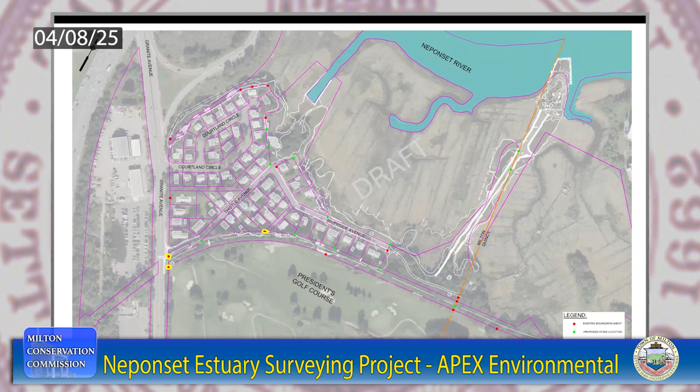Perfect, thank you very much. That is to continue the conversation of going out there, looking, and being aware of the property encroachments. I know we previously did a review on paper, but sometimes it's also helpful to visually see the property bounds for both parties, the residents and the town, to have a better idea of the path forward. Perfect, so that's kind of the hopes there.

Okay, so moving forward, here's an overall view of the proposed concept plan. This is an updated draft we are working on since incorporating the feedback from the visioning workshop we recently held at the end of March. I will go through quickly each of the further views of each sheet of the overall plan, but just to give you an idea of how the trail network is being proposed to be laid out.

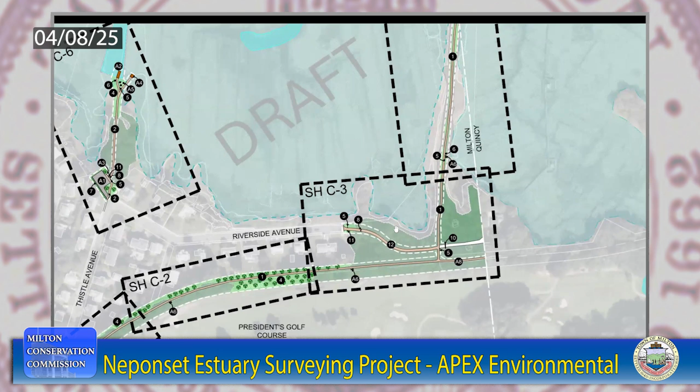We have about 1,500 linear feet of new trail shown in the railroad corridor, starting off of Granite Ave here, and it would be tying into the crosswalk along Granite Ave. Then the new trail along the railroad corridor would tie into the existing trail. This would be all resurfaced or new accessible trail surface, and then it would lead out and follow the same alignment that it follows today out to Black Rock.

And then the other section of trail that we're proposing is the Mount Hope Canal, where it starts at the intersection off of Thistle and Riverside Avenue. So now I'll go into more detail on each section of the concept plan.

So as I said, the new trailhead would start off of Granite Ave, tying into existing pedestrian connectivity and proposing to redesignate the parking area across the street into a shared parking area for users wanting to walk the trail. The new trail would be a minimum of 5 feet wide with an accessible surface treatment.

In the brighter green areas, we're showing either vegetative enhancement or green space to address where we've seen property encroachments such as yard debris or existing sheds, relocating that and bringing back tree cover or salt tolerant shrubs. At about 600-foot intervals, we've located accessible park benches as rest areas along the trail to provide further access to users.

Moving along the trail, the new trail system would tie into the existing trail. This is something we incorporated from the visioning workshop, since discussing with the city of Quincy, they mentioned interest in improving the portion of trail that crosses over the town of Milton line into the city of Quincy at 0 Harriet Ave. There may be opportunity to better tie the trail system from Milton to Quincy, because users come over from the Quincy side to get out to Black Rock.

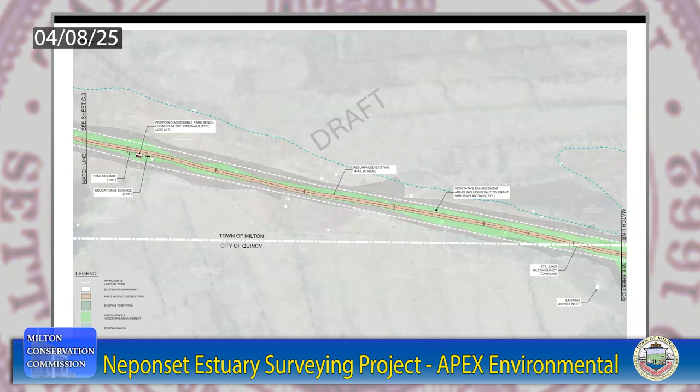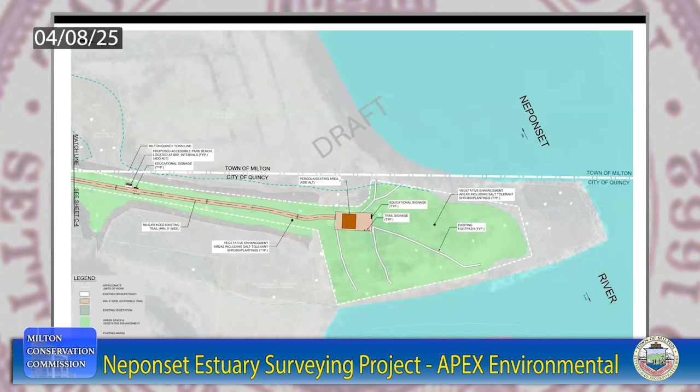Again, we have located a rest area, and you'll begin to see trail signage and educational signage out to Black Rock. At the point out at Black Rock, we've proposed a pergola with seating area as a vista point for users to sit and enjoy this area and river access, as well as potentially bird watching and enjoying the natural habitat and estuary.

Along the Mount Hope Canal side, we've shown a new trail tying into the existing sidewalk off of Thistle Ave, and resurfacing the existing trail to be ADA compliant, potentially proposing a canoe and kayak launch ramp, as well as accessible picnic area and educational signage adjacent to the Mount Hope Canal.

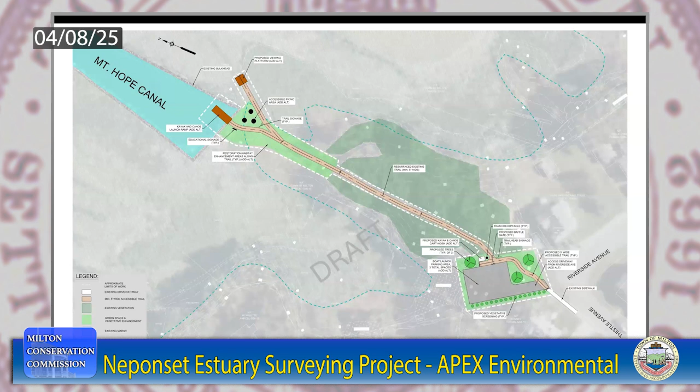We also discussed during the visioning workshop what would be a feasible approach to building out this trail network. Some of the feedback we considered was a phased approach, breaking this project out into 3 parts.

One, hatched in blue, would be the railroad corridor - the new trail alignment, about 1,500 linear feet to the existing trail. The resurfacing of the existing trail out to Black Rock would potentially be phase 2. Phase 3 would be the build out of the Mount Hope Canal and parking area.

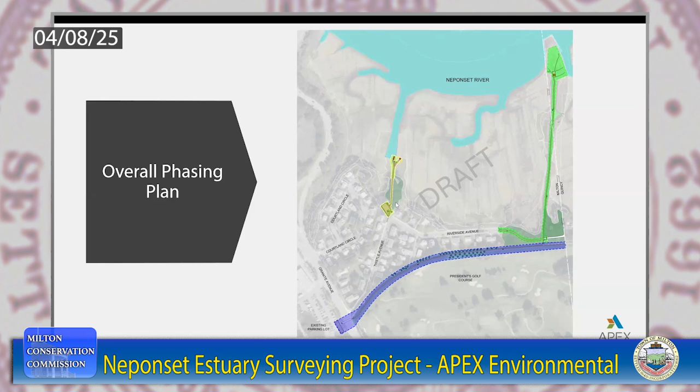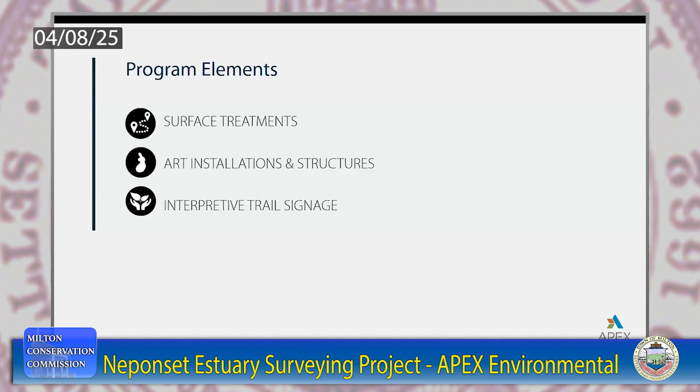Just to give you an idea of some of these features, such as the surface treatments we're considering, the ADA surface treatments, potential art installations and structures along the trail, and interpretive trail signage might look like, I've provided some examples of precedent images, just to give ideas of what the trail system could look like here in Milton.

So I'd be interested in seeing what the Conservation Commission's opinion is today on what types of material they'd like to see the trail built out with. Please note the trail could also be a combination of these surface treatments in order to reduce cost and provide less environmental impact.

Jamie, on that point, one of the things we discussed at the envisioning workshop was that a portion of this trail area is inundated periodically. And when I say periodically, it's not just regular tides - sometimes it's king tides or full moon tides, the big tides. So to the extent there are areas regularly inundated with water, the stone dust might not work because it could get carried away by the tide. In thinking about these alternative treatments to make the path ADA accessible, we really have to keep our eye on where the flooding is going to occur. And by the way, the flooding is going to get worse, not better, over the next 50 years or so.

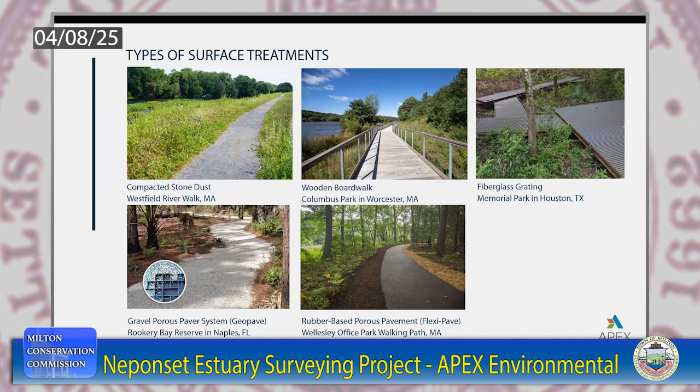Yeah, and then ultimately it will provide the town with the information to make a decision on maintenance and cost in order to select types of surface treatments moving forward.

So I think we've covered most of this, but let me categorize some of the key takeaways from the feedback we've received so far between short-term and long-term planning. Some key takeaways in the short term: the driver of the design is accessibility and maintenance. Material selection and surface treatment for the trail should minimize environmental impacts. For short-term planning, we'll continue stakeholder collaboration with the City of Quincy and potentially Norfolk County, and continue internal conversation about long-term maintenance responsibilities.

For long-term planning, some key highlights mentioned were looking at climate adaptation and incorporating the Neponset River Watershed's report on the Neponset River and estuary, and how that ties into the development and improvements to this trail system. As well as looking into user safety and education, keeping that a focus as the trail design progresses. And looking at future connectivity opportunities with the City of Quincy's trail system—they're also looking at improving their trail, so there could be an option for a future grant to work with the City of Quincy and the Neponset River Watershed Association. Long term, we're also looking at how these trail improvements can enhance and restore some of the vegetative areas we've seen taken over by invasive species.

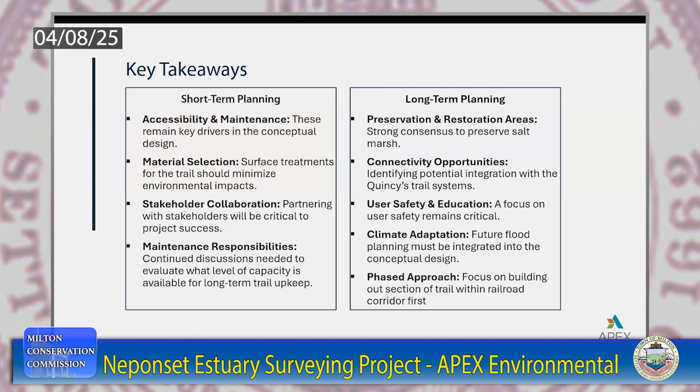So next steps: Thursday, we'll be going out and installing wooden stakes along key property bounds. End of April, beginning of May, depending on additional feedback we receive, we'll be working on wrapping up the draft memo, fact sheets, and conceptual design and costs. Following that, we'd like to host a hybrid progress meeting to review project deliverables and walk the project site to look at those wooden stakes and where they were installed along the key property bounds. Then, to wrap up the project, our last task is to present all of this information at a public meeting.

And that's the update I have for tonight.

Jamie, that was very good, succinct, direct. I'm very pleased that you were able to present tonight. Maybe we ought to put this on our May agenda anyway. I know it says early to mid-May, but just to protect the public record, we should put it on our agenda for the May meeting, because it looks like we might be at a point to at least get up to speed on where you are with the public meeting.

Sure, I can talk to Arthur about that. I think it really depends on if there's any more feedback we need to incorporate into this draft submission in order to have the hybrid progress meeting. But I look forward to pushing this along and hopefully meeting our early to mid-May deadline.

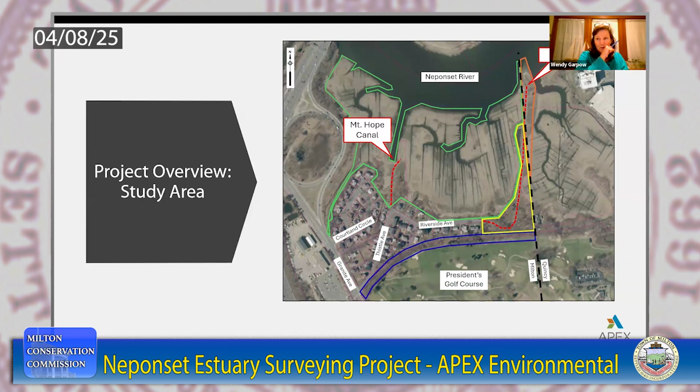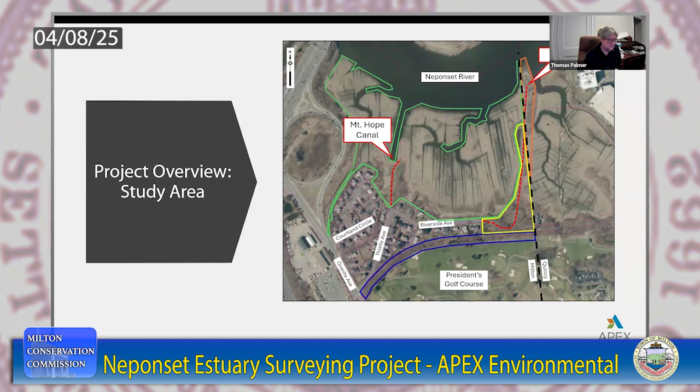Sounds like a good plan. You may want to talk to Tom about whether or not he wants to announce a public meeting and have a joint public meeting in May, or at some point we'll definitely have to do that, but that might be at the actual public presentation.

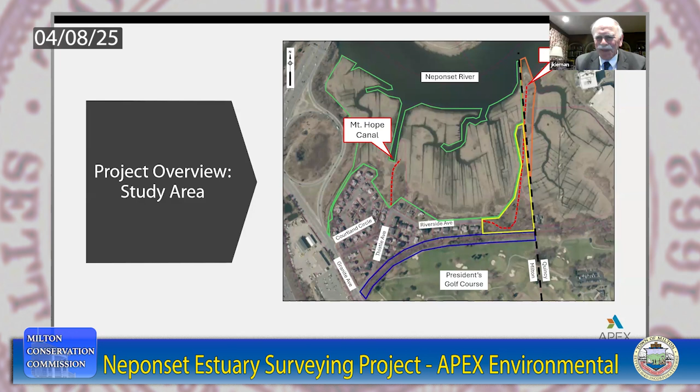It's certainly a great idea to have - I know you have the eyes and ears of the Community Preservation Act committee here, and you're our designee there. But I'm wondering whether at that first meeting it should be a joint public meeting for both committees and others, or perhaps just representatives. But clearly the next step after that would be the public announcement of this, and probably we could do it on site, as we did the site walk. That's just a thought down the road. But you're right, it's all within mid to end of May, because we've got to move pretty quickly on this, and funding will be critical to phase 2.

And since the funding is only open once a year, I would hate to miss this next round and then have to wait until 2026. I agree.

All right, Jamie, I don't know - what information would you need in order to apply for the CPC application in this round? I'm sorry Jamie, could you repeat your question please? What information or what final deliverables would you need in order to apply for the next round of CPC funding?

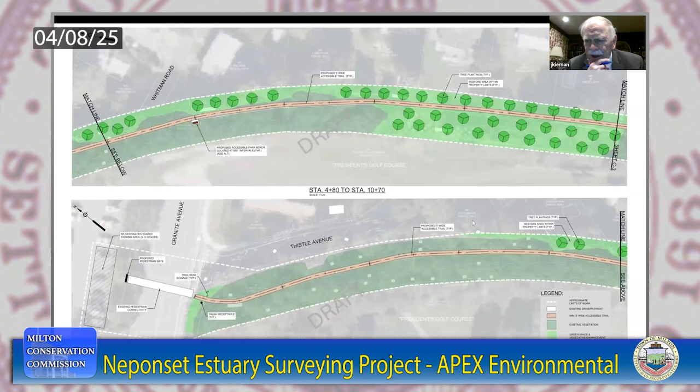Just so I make sure I'm understanding what it is I'm asking of Tom: we're hopefully going to have Jamie come back to present at our next Conservation Commission meeting on May 13th. Then in addition to that, there's also going to be another in-person on-site presentation later, which would be the public meeting. Both would be public meetings, properly announced, with notice going out per the open meeting law. The first is a Conservation Commission meeting to discuss the concept plan and preliminary costs.

And then after that, according to Jamie's schedule, she contemplates having the public meeting, which could be done on site as well. I think that's what Jamie, you were contemplating, correct? Yeah, it's this hybrid progress meeting—we're trying to have a hybrid progress meeting before we finalize the plans and present to the public. That's what this progress meeting is for. So before or after the progress meeting, we'll have the meeting. I'll be back for the Conservation Commission meeting on May 13th, and then following that would be the public presentation. Does that answer your question, Wendy?

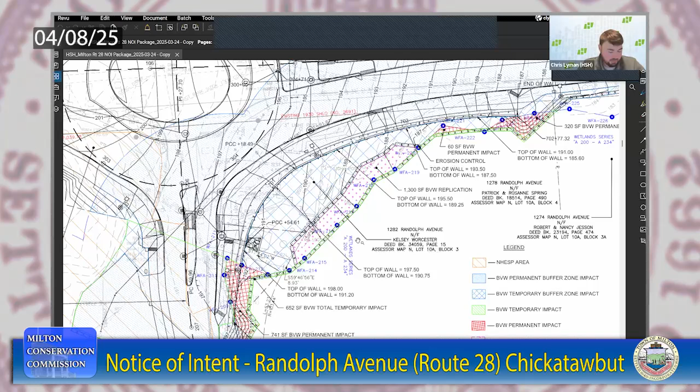There will also be restoration of the temporary impacts along the sediment control barrier with a wetland seed mix. The wetland replication area is being designed with existing vegetation cover types, functions, and values, and will provide more improvement to this BVW. The replicated wetland area will be graded to create a hydrologic gradient that supports the range of cover types proposed for this project.

After the grading of this wetland area is complete and the construction is finalized, the sediment control barriers will be removed and a wetland seed mix will be put down to restore those temporary impacts.

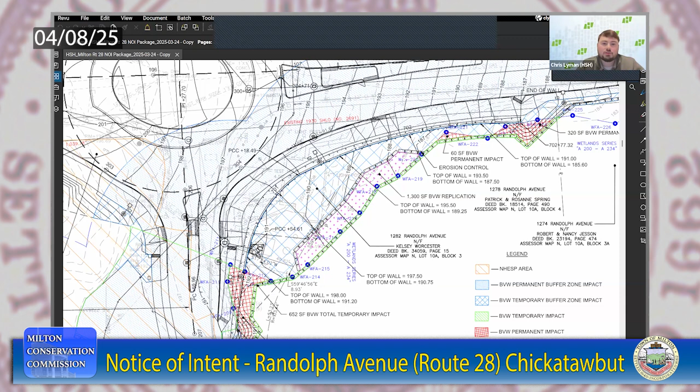We're also proposing to include drainage updates at this location, one of them being updating the outfall at this location, basically just putting more stabilization rock at this stormwater outfall down here to better stabilize the bank of the outfall itself.

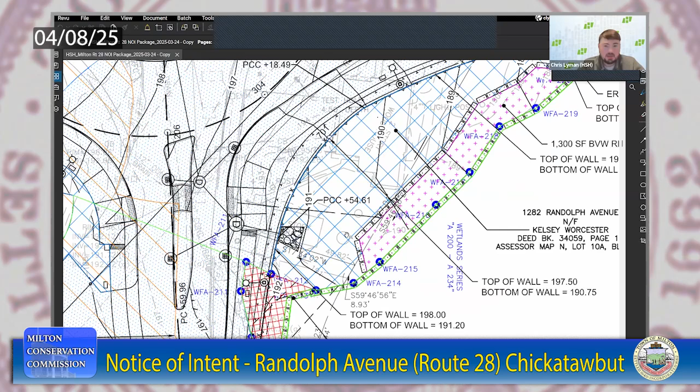And we'll be putting in silt sacks at all existing and proposed catch basins within the project limits. I don't know whether Courtney or Steve would like to add anything to what I've presented on so far.

Can I ask a question? This isn't really an environmental question, and I know there aren't a lot of pedestrians in this area, but there's a light there now, so it allows for pedestrian crossing. I know it's a dangerous intersection, but with the rotary, how do you get people across there?

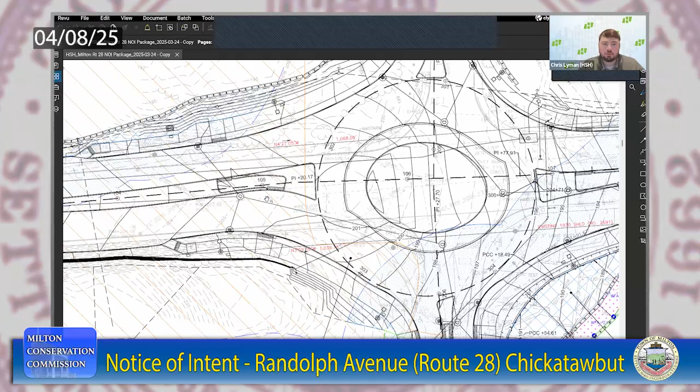Yeah, so we have pedestrian hybrid beacons going in, a form of a light, only on Route 28. A pedestrian or bicyclist will come, press the button, and it'll initiate a stop control on the approaches on Route 28, giving a protected crossing for pedestrians or bicyclists crossing. On Chickatawbut Road, we're proposing flashing beacons at this location, which isn't a stop control, but it alerts vehicular traffic that there's a pedestrian trying to enter the crosswalk.

Great. Okay, thank you.

I'm sorry, on this diagram right now, which way is north? North is to the right of the screen here, and south is to the left of the screen.

So the barn that we inspected a few years back, probably 5 or 6 years ago, that was going to be rehabbed or moved or something, is that to the right side of the diagram?

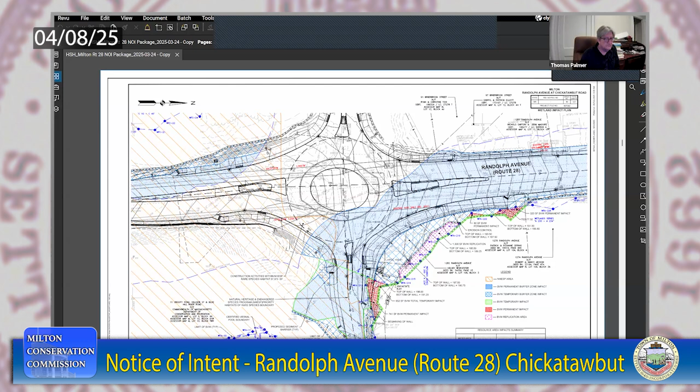Let me pull up the sheet and pull that off the diagram.

I think the barn you're talking about is this structure right here, this wooden barn structure, at the southern limits of the project.

Yeah, because we had seen some wetlands in that area when we were there a few years back. Yes, in fact they're on the plan, John. We've added the wetland here, and given that buffer zone, as I said.

From that wetland there's some permanent and temporary buffer zone impacts, strictly in this location where we're adding the sidewalk, and you can see we're slightly widening the roadway here to accommodate the roundabout.

Good, okay, that was just orientation. Chris, question - how far south is that sidewalk going? Is it going down to the barn?

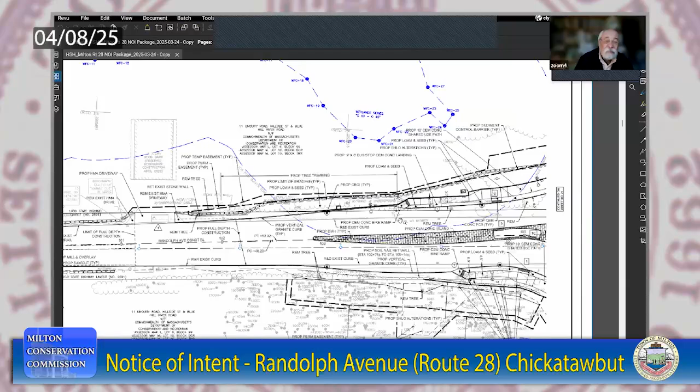No, it does not go down to the barn. You can see the barns here, and the sidewalk, or the shared use path, stops at this location right here. So it's only a couple hundred feet, I guess you'd call it, south of the existing intersection. Okay, thank you.

Can I ask why a rotary is now a roundabout? Because it's the same thing, right?

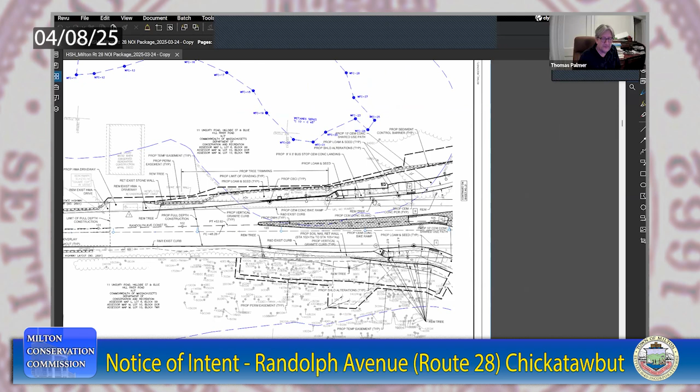I know that specifically the terminology we're using is for the roundabout. It basically has to do with the size and the function of a roundabout. Rotaries aren't always roundabouts, but roundabouts are a form of a rotary, if that makes sense.

Roundabouts are strictly a certain size, and they try to minimize speed of traffic entering and exiting the intersection.

As I look at this, and I look at what I guess would be the southeast quadrant here, I don't see an existing conditions plan, which would help us understand how this relates to what's there now.

And I know in that quadrant there is a parking lot, and it also has a gate that extends across Chickatawbut Road. What's happening to that parking lot and that gate?

Yes, so you're talking about this location down here. There's a parking lot - part of this project is reconstructing part of this parking lot here at this location.

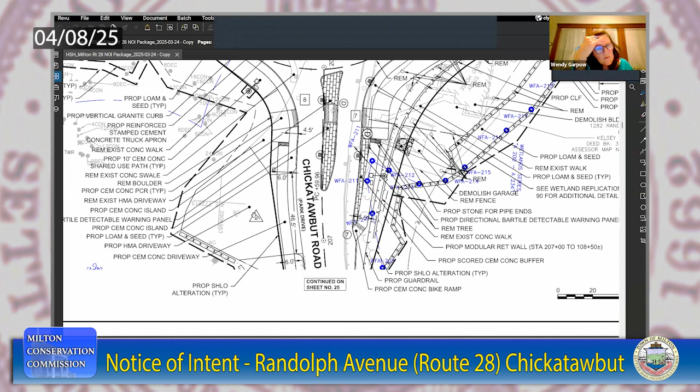And if you go farther up Chickatawbut Road, let me just go one more here so you can get a better look of this side, just so you can get a better orientation.

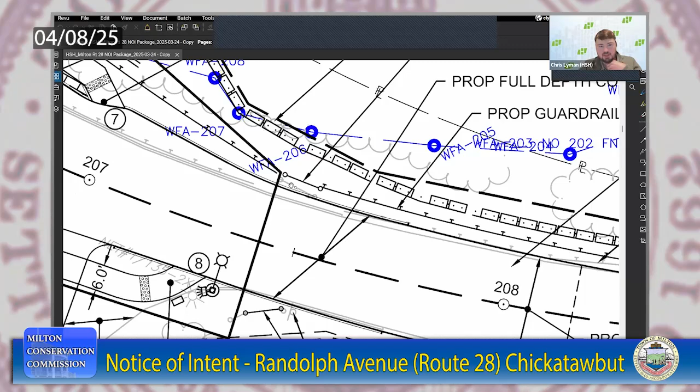So this is the parking lot you're talking about here, the parking lot to the Blue Hills Reservation. And the gate structure you're talking about is right here - you can kind of see the existing gate structure. We are maintaining those gate structures; right now we're just removing and resetting them as part of this project. So those gates will be remaining.

To me, the mitigation of that project should include consideration of how to increase the value of the priority habitat here.

And what I'm talking about is trying to prevent animals from being run over, which is a common cause of death.

I think the project as a whole is permittable for wetland impacts, as you're suggesting, but it should take some imagination and creativity to address this habitat issue.

Yeah, we did submit a MESA checklist and a copy of this NOI to Natural Heritage. We've also been talking with Fish and Wildlife about that exact issue you just brought up. It wasn't in the scope of this project, but we have been talking to Fish and Wildlife.

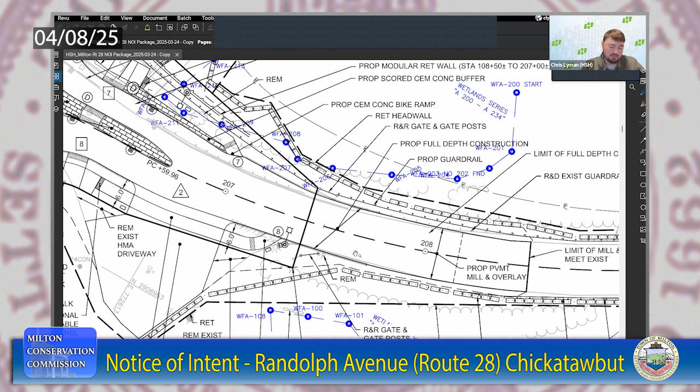They've been talking about potentially putting in gates, updated gates, to help get seasonal closures for this location, but that is not in the scope of this project.

But we have been working along with MassDOT, Fish and Wildlife, and DCR to address that potential problem of endangered species and species getting hit in this location.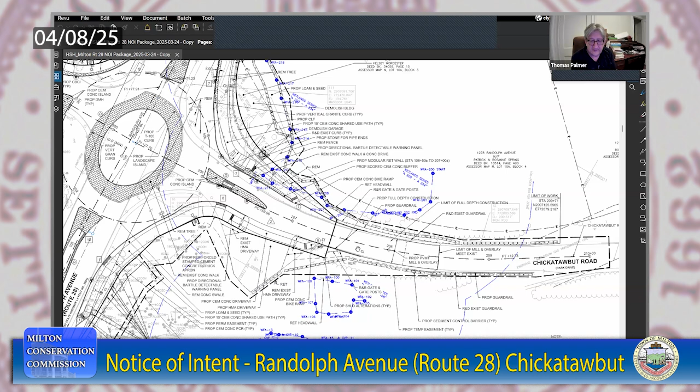As you go south on 28 from here, you're going through the reservation, which is very popular for people to visit. Many people park on Route 28 to the south, particularly beyond the wetland at the southwest slope of Chickatawbut Hill. I'm one of those people who often parks on 28 to visit the park, and when I get back in my car, I have to get back onto 28. The way I'm able to do that is the light creates breaks in traffic, a little gap where no car is coming. Will those gaps still happen when that light is replaced by this proposal?

I don't know, but we've been talking to other residents about the same concerns about gaps happening at their driveways. Again, there is a potential that those gaps might be less significant. But Steve, I don't know if you wanted to add anything specifically, because we've been doing some memos too about those specific gaps caused by the existing signalized intersection.

Sure, I'll jump in if allowed through the chair. My name is Steve Tyler with Howard Stein Hudson. In answer to Mr. Palmer's question, there is a difference in gaps expected. Separately, there's been some corridor studies looking at that effect and what effect it has for people pulling out and so forth. So those are available, but there will be a change in conditions on the Route 28 corridor with the change from a signal to a roundabout.

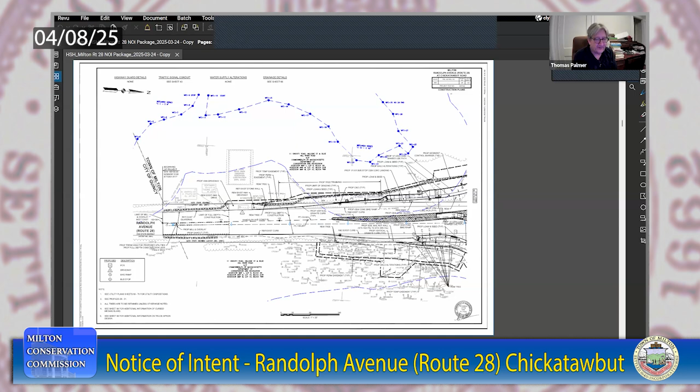One more follow-up to what John Kiernan said - you said there will be pedestrian crossings on Route 28 south of the roundabout. Will there be pedestrian crossings? Will there be four of them? Will there be pedestrian crossings at every side of this?

Yeah, if you look at the plan, there are pedestrian crossings at all 4 legs of the roundabout itself. On Route 28, because of the higher speeds and higher vehicle traffic, we are putting in pedestrian hybrid beacons - a stop control that's basically a red light that stops traffic and allows pedestrians to cross in a controlled intersection. Whereas on Chickatawbut Road, where speeds are a little less, we're putting in flashing beacons to warn that a pedestrian wants to enter the crosswalk. But yes, there are crossings at all 4 legs of the intersection.

So is the wetland currently flagged? I believe they are, yes. Okay, because I'd like to take a site walk there. I think it's appropriate. But I just want to make sure it's done under safe conditions for all of us, because it is a difficult traffic area.

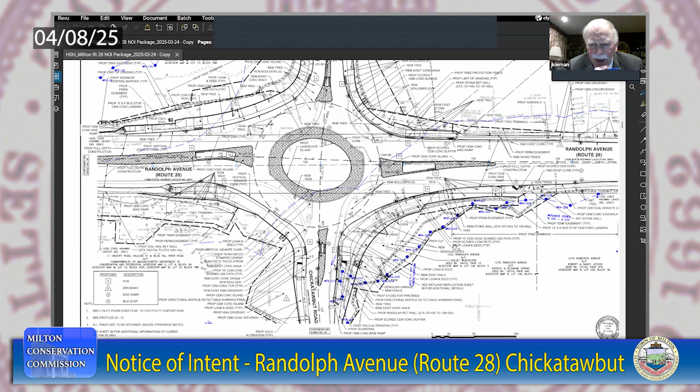I think there'd be places for us to park, either at the barn on 28 or Chickatawbut Road, right where that fence and gate is that Tom was mentioning. There's an area there. Is anybody else interested in a site walk? Commission members? Yes, yes.

All right, we typically do this on Saturday morning. Is that something you could accommodate? I should be able to, yes.

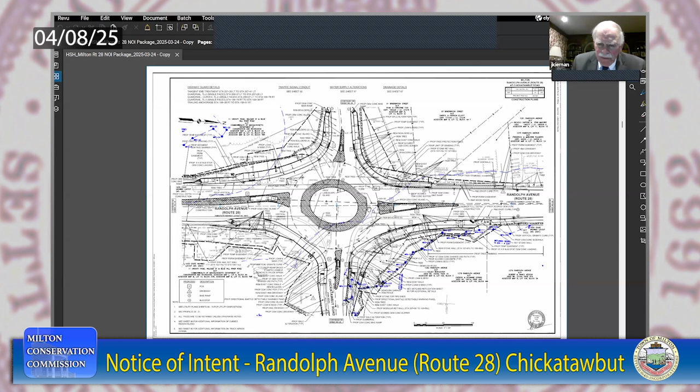Very good. Everybody, if you would, look at your calendar to see whether or not we can plan one within the next month. Dates in May? How about next Saturday?

Let's go through it. I don't have a preference for one Saturday or another. John, that's the Saturday before Easter, and some families may have plans. Perfect, how about the following Saturday? Works for me. What's the date on it? That's the 19th. The 26th.

I'll be out of town on the 26th. No, I won't be able to make it. So wait a minute, which one is Easter? Is it the 19th?

The 19th or the 12th? No, you mentioned the 19th, and I said— No, I said next Saturday. Oh, next Saturday, you mean this coming Saturday? Yeah, it depends. That'd be next Saturday. How, what do you mean by next? This coming Saturday is the 12th. Is that the date you mean?

You're right, I'm just throwing out dates to see what's most convenient for most people. So we've got the 12th, 19th, 26th, and what's the one after that? I don't think there's one in April. After the 26th is what? The 3rd of May. May 3rd. All right, so the 12th is too soon, the 19th is Easter, so our choices are the 26th and May 3rd.

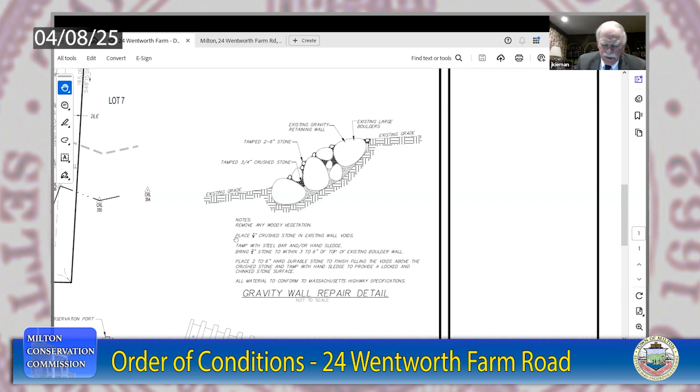Yes, and I note carefully the discussions we've had in the past, and I did read Deb Keller's recommendations as well. So the simple answer to your question is yes.

Okay, that's good news. As far as what Deb added to the drainage from the previous plan, she added about 100 cubic feet of storage with stone on the top and the bottom while maintaining the elevations, which was brilliant, and added some additional overflows which allow larger storm events to pass through easier as opposed to backing up. Again, brilliant.

So she made the plan better, and the client's happy with it. As long as you guys are happy with it, I think we're ready to go. All right, Jim, I think questions? Go ahead. This is Steve Ivis, I think Deb did a wonderful job.

Thanks, Steve. You don't get any credit, Jim, at all. Are you kidding? She's not here. She's not here, it's too bad. She did a great job. Jim did a great job. The two of them worked well together, which is always helpful.

Thanks, Ned. Sorry, Jim, and you're right. We have a client who's pleased, if this is the final plan, he's pleased with it. He's ready to get to it immediately, and appreciates the consideration given by the commission as we've moved through, what has not been an easy process.

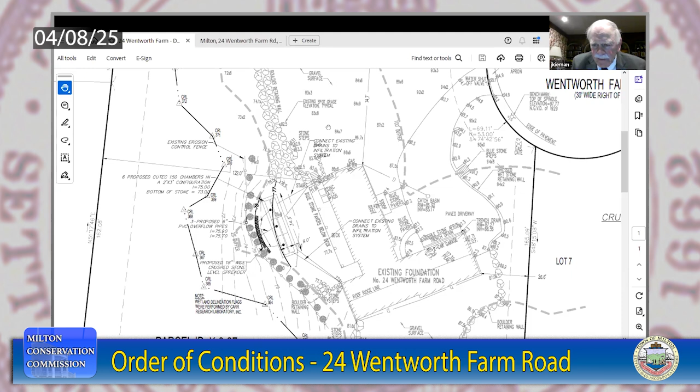John, this is Arthur. This solution addresses the concerns I had, and I'm very pleased with the resolution for us. Good, yeah John, it's Charlie. I agree with Arthur, this looks good. Right, Tom, Wendy, Ingrid - nothing to add.

I also know that Deb commented on the detention area within the circle. It's not part of this plan, but she had some additional recommendation to remove the wood chips and replace with crushed stone. I don't know if there's a mechanism that the commission can undertake to try and force that type of change, but that would be an improvement. Drainage as it comes down, potentially down the driveway into the client's property.

Yeah, it's a fair question. It's really outside the scope of this enforcement order, but it does have a direct impact on your client's driveway, because when it overflows, it goes right down the driveway. So I think it's a fair question. My response is actually more of a question. It's my understanding that the homeowners organization is now up and running, whereas it wasn't before.

And I think that if it was your comment, Ned, or I think it was in Deb Keller's note as well, that there should be some kind of an O&M plan for this. Certainly part of it would be shifting from the mulch - I think it's back to crushed stone, because I think it started with crushed stone. And then they made it look pretty, and they put in the mulch. But Steve, I'll defer to you on this - do you think the crushed stone is better than the mulch? Because we all saw what happened to the mulch - it went into the center.

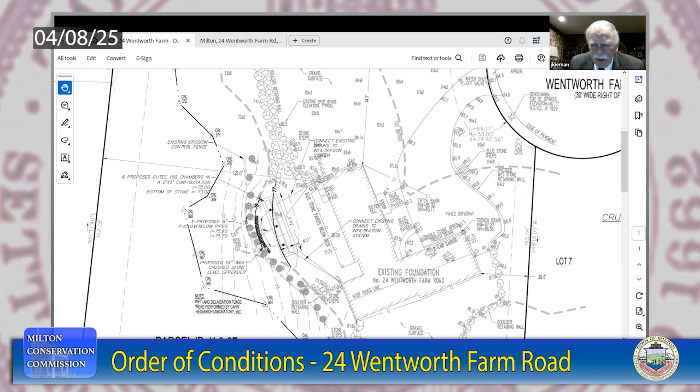I'm not hearing one. There is, Mr. Chairman. Second. All right, yeah, there was a second - Arthur's motion? Charlie, Charlie, you get the second. Okay, perfect, thanks. Is there any discussion?

I should have asked, are there any comments before we even got to this stage from abutters or members of the public? Which might be important because the homeowners association are all neighbors. But seeing none, a motion's been made, it's been seconded. Is there any discussion? Hearing none, we'll go through a roll call vote for this.

Ingrid, how do you vote? Yes. Arthur? Yes. Wendy? Yes. Charlie? Yes. Tom?

Appreciate your patience. Thank you for your patience as well, because it's been a much more iterative process than a lot of these processes are expected to be. So we appreciate it. Good, all right, thanks all. Good night, thank you guys.

Thank you, good night. Next on the agenda is electronic signatures for the Conservation Commission.

At Philip's suggestion, which would make his life much easier rather than chasing us, I talked to Peter Mello, who followed up with an analysis of what was needed to shift to electronic signatures. It's not problematic, but it's cumbersome, John. Cumbersome. Yeah, that's a good word. But Peter was kind enough to do an assessment and analysis for the Conservation Commission.